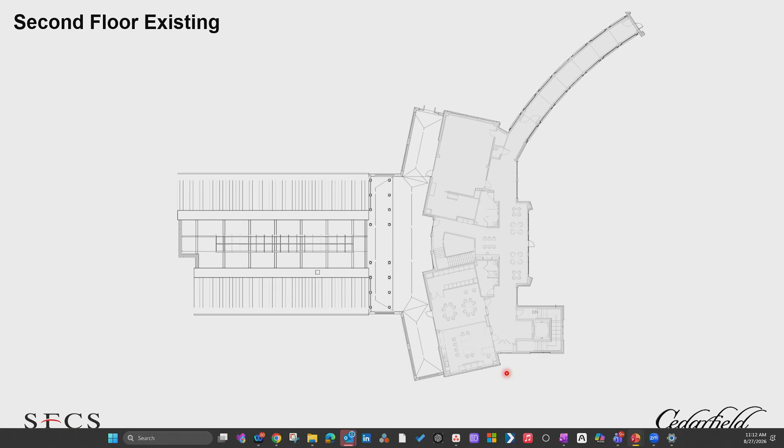So what we're looking at is really expanding the arts and gym studio, because it's amazing for me to be touring and walking through and seeing that these spaces are so used and so loved that they're quite literally busting at the seams already. And we just opened a few years ago, so it's an incredible honor and experience to see how used the spaces are.

So thinking about that, and at a high level, the concept that Amy mentioned is really looking at opportunities to expand this building outwards, adding additional square footage for the art studio, theater space, as well as the brain gym and additional gym equipment. So I brought up some lines just to show everyone, and I'll use this laser to walk us through.

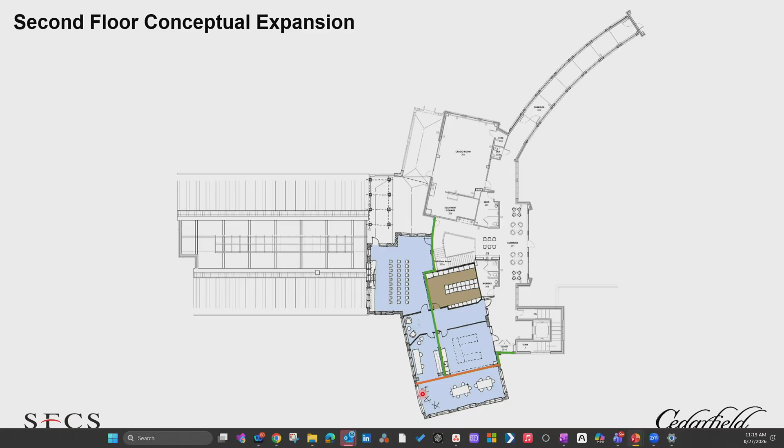So adding a lot of additional square footage for the art studio and the theater space. I'm going to jump to the next slide that zooms in a little bit and shows it a little bit clearer.

So here you can see some of the wonderful spaces that we can envision together for the art studio. We've got the expanded storage rooms.

Really there's a need to have the artists have space dedicated to store their artwork for times when they may be outside of the art studio—having that dedicated space so they can place their art, come back and get it, and continue to work on it the next day.

As well as thinking about opportunities to have more studio space, including some dedicated, private art studios to work in—expanding out to incorporate more workable space. Right now we're just showing tables to get a feel and sense of the size and scale of the space, but we'll work with the team to understand what exactly needs to be captured to make it the most usable for the artists.

And then also some additional easel space, art space. Again, this will be developed—some more working studio space, some cabinetry to get the right components in there for the artists.

And then to the north here, on top of the sun deck—this is the sun deck that overlooks the roof of the pool—we're adding this multi-purpose theater room space, looking at opportunities for art history lessons, speakers, movies, smaller lectures, and having screens or a TV in there. It's just going to be an absolutely gorgeous space.

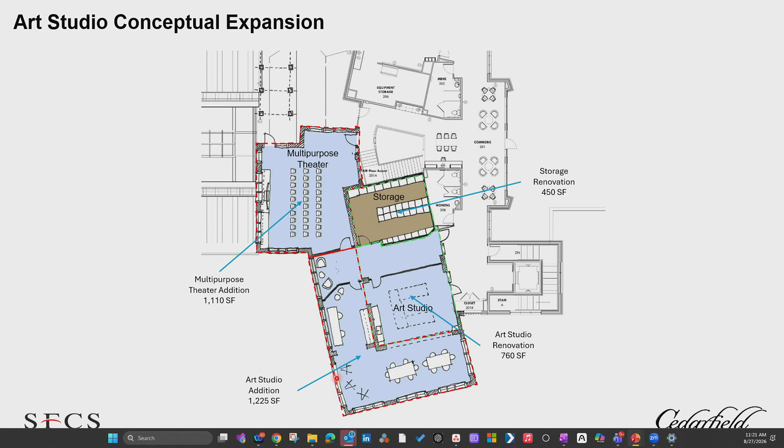So why don't I share, if it's okay, I'll continue moving on and we'll show some of the 3-dimensional images that really show what this building looks like from the exterior. Please continue to ask questions. I love the engagement and energy.

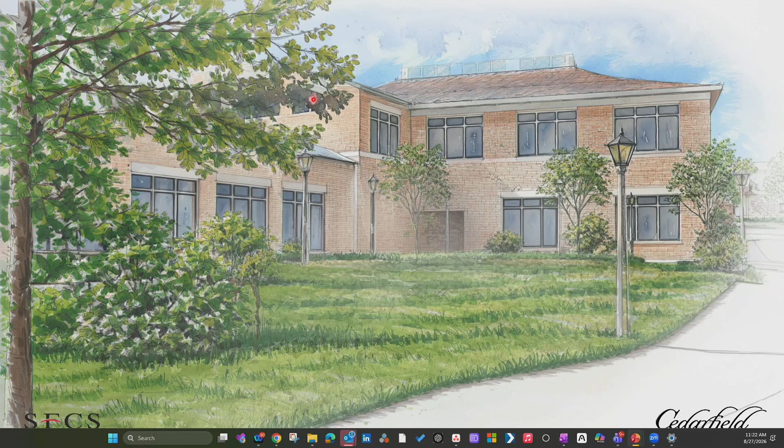So here is the view of the multi-purpose room and theater. And then expansion beyond, underneath this roof area, is the expansion of the art studio.

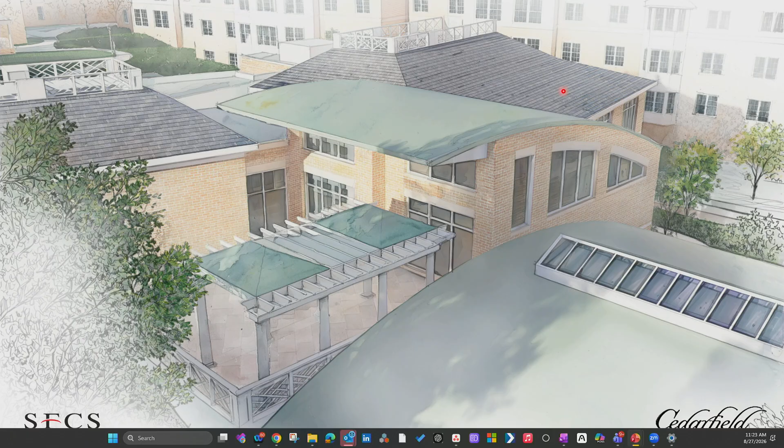Curtis, we have a question. What happens to the exercise class space? It's a great segue, I'm going to go downstairs next. Actually she's talking about the fitness classes upstairs. Oh, I am so sorry - yes, nothing is changing with the upstairs fitness classrooms.

We're new here and we've just started taking classes, and at least 2 or 3 of those classes, that room is packed every single morning, to the point that people are almost on top of each other. So I guess I would ask that people consider expanding that space to allow for that.

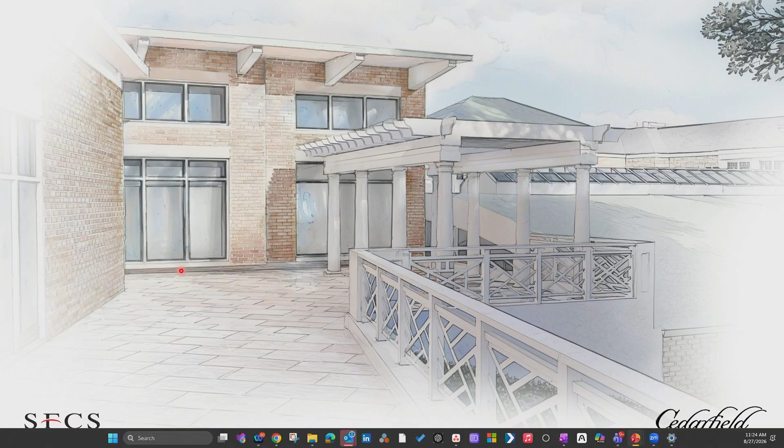That's incredible for me. Going downstairs, just a quick overview of the lower level. So to orient us, here's the elevator and the stairs around. This is your current gym space.

And as you traverse through the corridors, here's the entrance to the pool space. So the area we're looking at is the current gym space, and what we're going to be doing is adding the art studio above, with this expansion of the gym below. Really looking at adding some additional elbow room below to incorporate many new fitness opportunities for brain health as well as physical fitness.

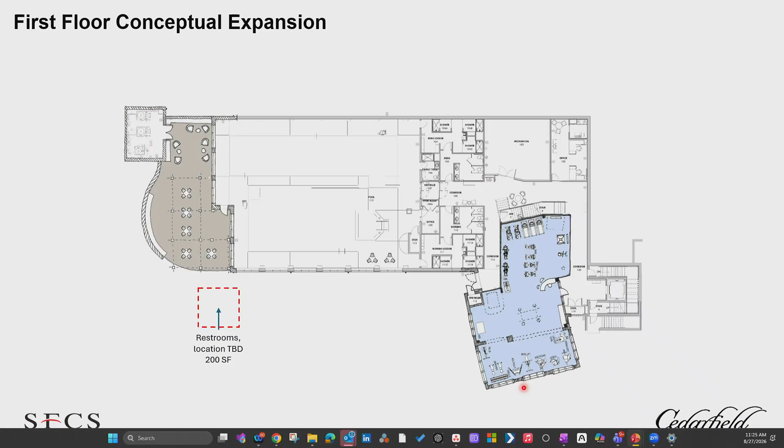So really looking at additional space to incorporate these. These are just concepts, and we're going to continue to develop these and work with the team to get the right pieces for you. And I know a few of you are saying boxing, we're seniors.

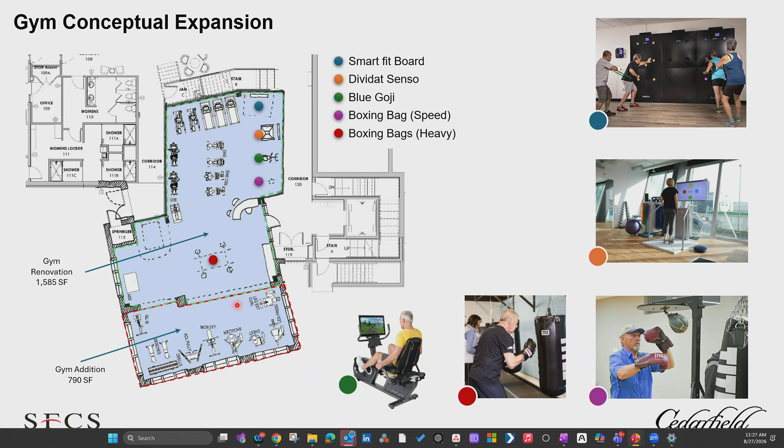Thank you, Amy. So as well on the lower level there's an additional patio space on the other side of the pool. This space, we designed it early on, and it's not really getting as much utilization as we thought. So we have been coming up with some ideas to really bring new excitement to that area.

Some of which is looking at an additional way to connect out there from the current indoor pool area, but also thinking about opportunities to add shading to make it more comfortable. It won't be as bright in direct sunlight, really adding and looking at new seating arrangements. So we'll be engaging with our interior design team to make sure we've got some comfortable opportunities to really engage that space and use it for the functions that you'd like.

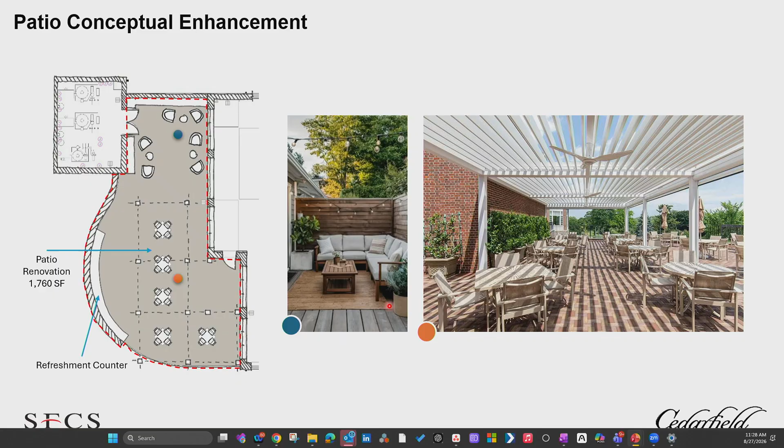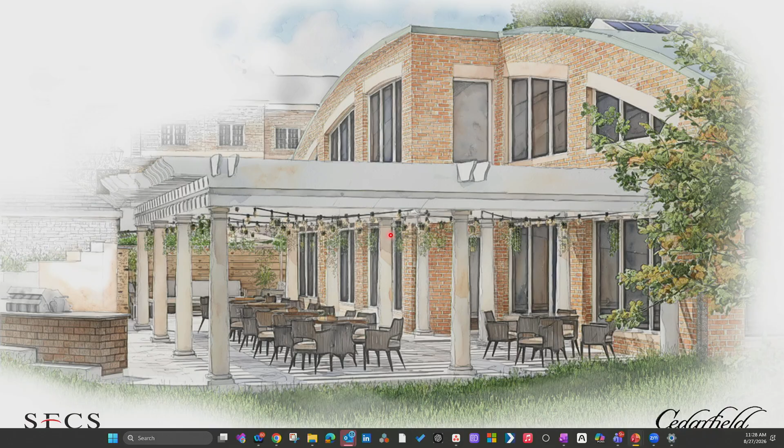So a couple of inspirational images. This is a rendering of what that space could look like. Here you can see your existing pool and existing pool windows, and a new trellis or pergola space out there. Really adding some amazing string lights, some vinery, just bringing life to that space. Also adding some new, really comfortable seating arrangements so that we've got opportunities to go and engage and sit and relax.

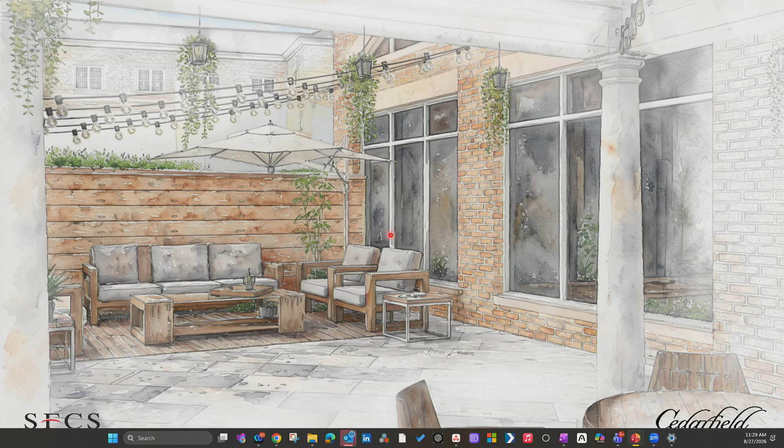So now I'm going to zoom back out a little bit, about a couple hundred feet over the building, and show you what this looks like as an overall project. So beginning almost over the top of where we are right now, looking back on the existing building, you can see here's that expansion of the art studio and the gym below, just expanding out here.

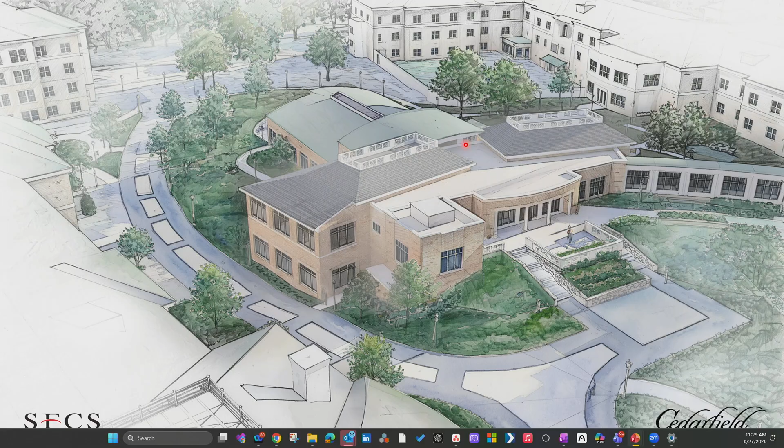And then I'm going to rotate. Oh, before I do that, you can see again the barrel roof over the theater space. And then zoom in around. So now we're about to the south, over above the gardens there. You can see the existing pool, and then here's the new theater space, as well as the expansion of the arts. And then taking the art, again, using the top of the current sun deck there to build additional square footage.

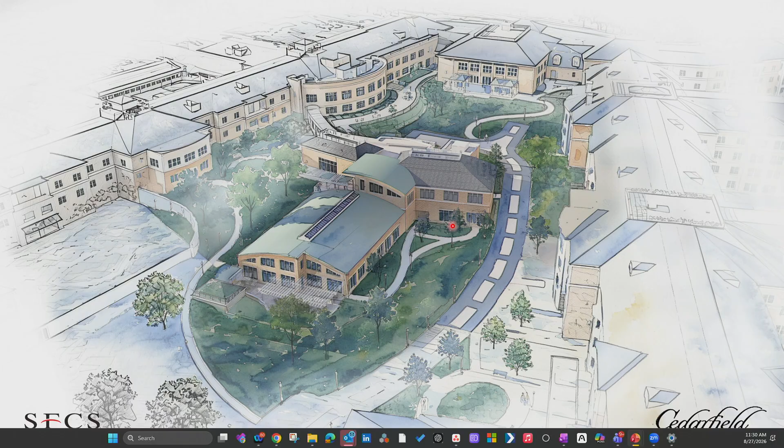And one more view, really kind of rotating around now over the memory support garden, looking at what this looks like. Just going to continue to enhance and make an incredible opportunity for the Pathways to Wellness program to be able to use, as you all and Cedarfield works best.

So with that, thank you very much. Any questions? Amy, anything you'd like to ask?

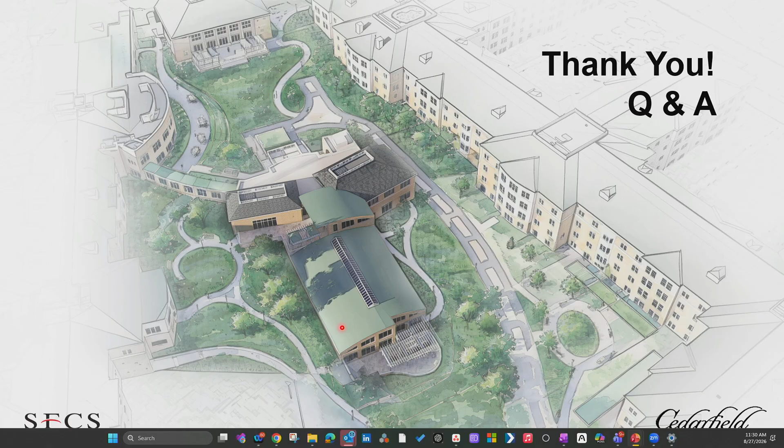Oh, yes, love it, love several questions here. Here's the big one: does that very, very generous donation for this cover the entire price for it? So the answer is no.

So actually, a few other people have stepped forward, and we're somewhere near $1 million right now in money that we have raised to cover this. This project is closer to $4 million. But we know that we can get closer to that $4 million range, and we have also the backing of Pinnacle Living, who will help us make sure that this is something that we could achieve together.

Other questions? Oh, we have one in the back. Okay, and I have one up here. Right here, let me get this one first.

Given the funding comes through, when are you looking to break ground? Sure, so actually, I'm going to take another couple of questions, and then that will be the next part of my presentation. On my way.

Aside from renderings, what about the engineering aspects, the structural foundation, et cetera? What problems do you envision, or is it a simple task of just going up with a wall? So the question was, really, what do the structural needs of the existing space need to be enhanced to carry the additional loads of the covered spaces?